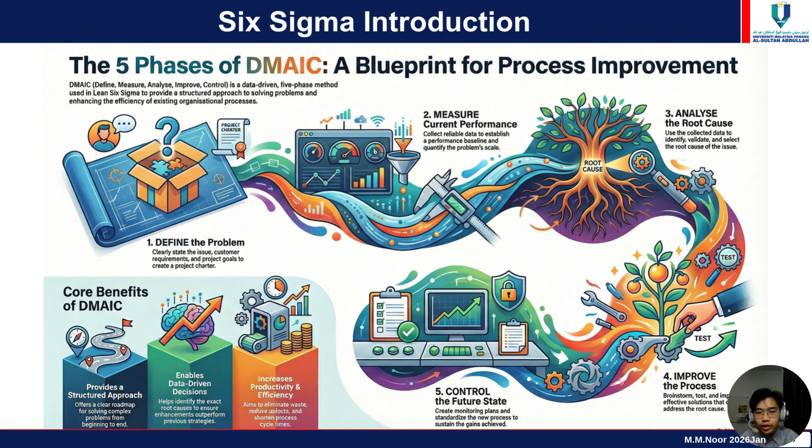Six Sigma DMAIC. Okay, now we are walking through the core engine of process excellence, the Six Sigma DMAIC framework. And if you look at this visual roadmap, you'll see that DMAIC isn't just a set of instructions. It is an interconnected life cycle. It takes us from identifying a chaotic problem, systematically measuring it, isolating the root causes, and finally establishing an automated control loop. And the key takeaway here is simply by applying this structured loop, we replace guesswork with data-driven execution, directly boosting our baseline productivity and product yield.

And as shown in this slide, this is our step-by-step pipeline. We start by defining the scope and locking in customer targets. Next, we measure our current baseline performance to understand exactly where we stand. Then we analyze the data to separate the real root cause from mere symptoms. In the improve phase, we deploy and pilot optimized fixes. And finally, we control the new process so we never slip back into old habits. It's a continuous journey where every phase acts as a foundation for the next.

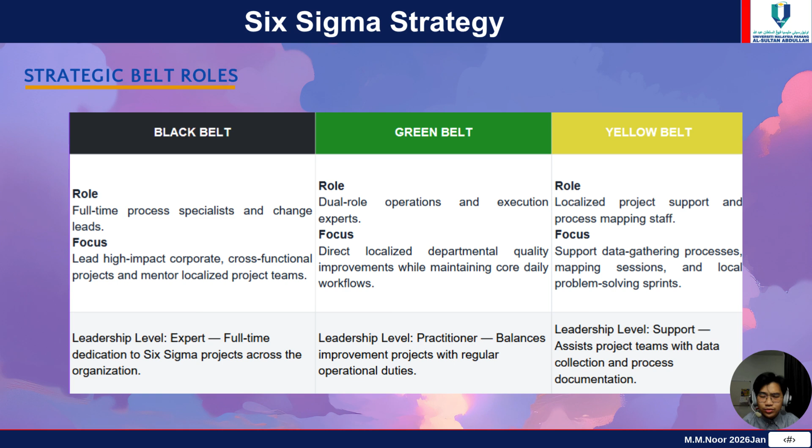So now, how do we organize our teams to actually execute this? Think of black belts as our full-time project leaders who can handle cross-functional, highly complex systems. And green belts are our operational practitioners; they balance daily engineering and manufacturing duties while leading localized improvements. And finally, our yellow belts support data collection and local process mapping. Having this clear division of labor ensures every tier of the factory has a direct hand in our quality culture.

And let's address a critical operational question. Out of hundreds of potential issues in a factory, how do we choose which project to tackle first? We use the two filters on this slide. First, customer alignment. The project must address a critical to quality parameter, meaning it must matter directly to the end customer. And second, feasibility. We look for projects with a clear financial return on investment (ROI) that our team can realistically execute within a tight 3 to 6 month window. If it doesn't align with the customer and it isn't feasible, we don't run it. This keeps our efforts tightly targeted and incredibly high yielding.

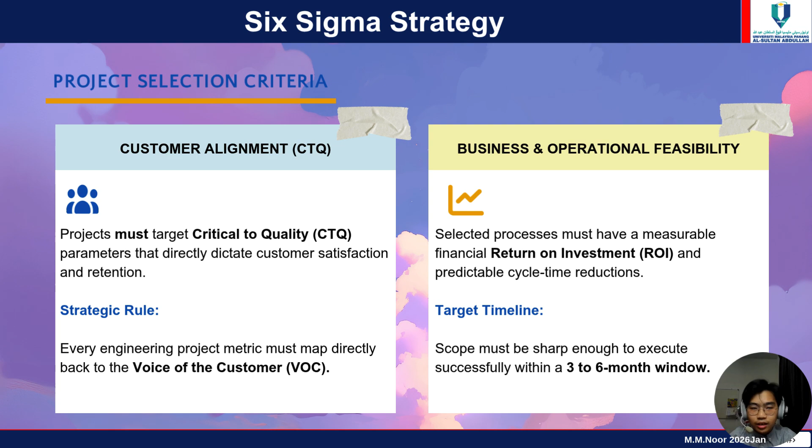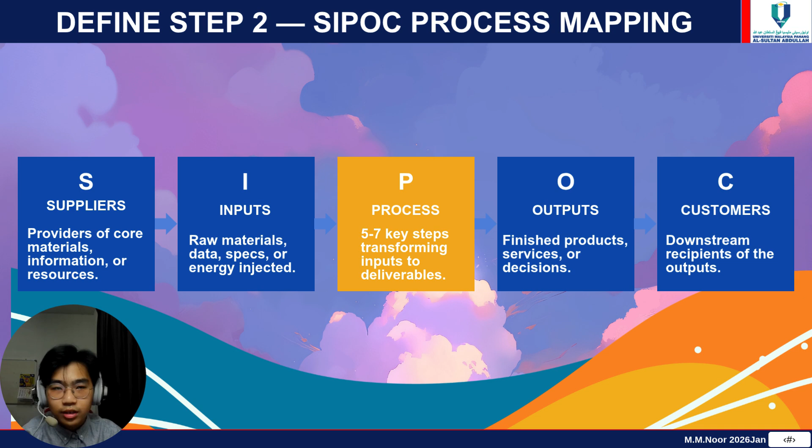Next, to ensure everyone is looking at the same process from a bird's eye view, we deploy a SIPOC map. This lets us align our perspective instantly. We map out our external suppliers and the critical inputs they inject, such as raw steel sheets or specific design tolerances. Those feed into our core 5 to 7 step process loop. And finally, we track our tangible outputs, in this case, our completed trays, and identify the immediate internal and external customer receiving team. This ensures that there are no blind spots regarding our process boundary.

Data collection is meaningless if we don't align it with what our market actually cares about. These metrics show exactly how we translate the qualitative voice of the customer into internal engineering metrics. For instance, when a customer complains that a component breaks too easily during assembly, we don't just guess a fix. We translate that into a measurable, critical to quality CTQ target, specifically setting our tensile fracture strength limit to greater than or equal to 450 MPa. Every customer complaint is converted into a clear, verifiable metric with an exact target specification.

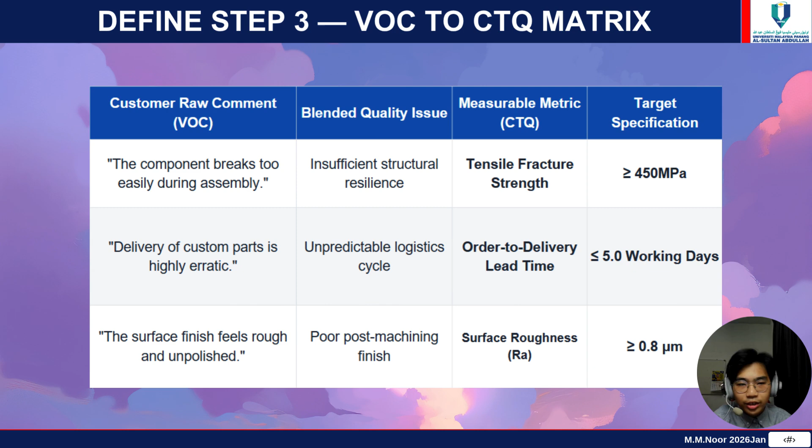So one of the primary reasons engineering projects fail is trying to fix the entire factory at once. To prevent that, we have drawn a hard line in the sand regarding project scope. Look at the green card on the left. Our team is strictly focusing on controllable variables, specifically the machining parameters on line 3, operator training for shift A and B, and our immediate steel tray thickness variances.

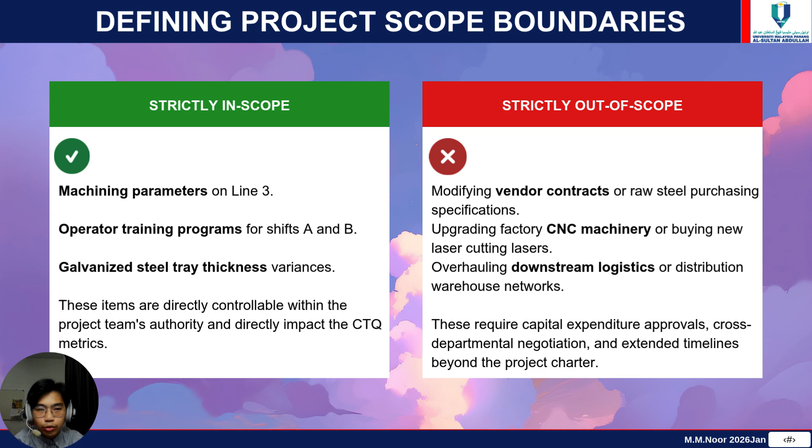Conversely, look at the red card on the right. Modifying vendor contracts, buying brand new laser equipment, or overhauling the warehouse logistics are strictly out of scope. This keeps our execution fast, targeted, and within our direct authority.

And to wrap up the define phase, I want to emphasize this critical warning on the left. Statistically, 50% of all process optimization projects fail before they even start, strictly due to poor initial definition. If you measure the wrong things or define your boundaries poorly, your improvement phase will yield zero real-world value. By locking down our problem statement, securing our business case, and clarifying our exact goal right now, we protect our resources and ensure this Six Sigma initiative delivers sustained, high-impact ROI, return on investment.

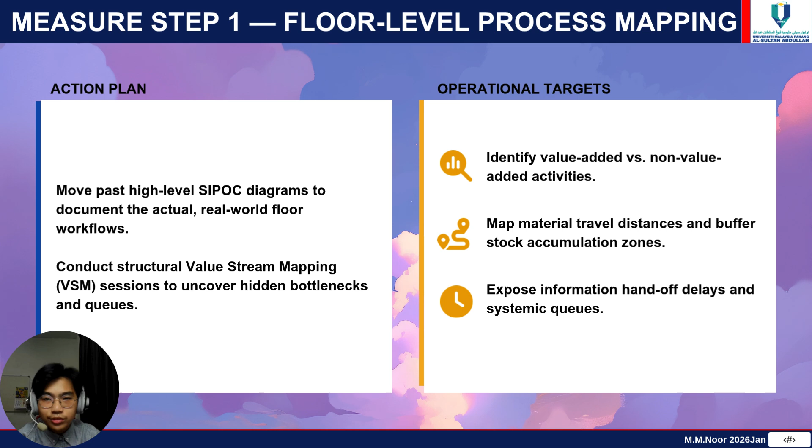Okay, let's move on to the measure phase. Alright, moving straight into the measure phase, our first operational milestone is floor level process mapping. While our previous SIPOC gives us a high level view, our action plan now demands that we walk the floor to capture how the process operates in the real world. We use structured value stream mapping, or VSM, sessions to physically track material travel distance, expose information hand-off delays, and flag accumulation zones where inventory sits in queues. By defining these targets, we clearly separate our true value added work from systematic waste.

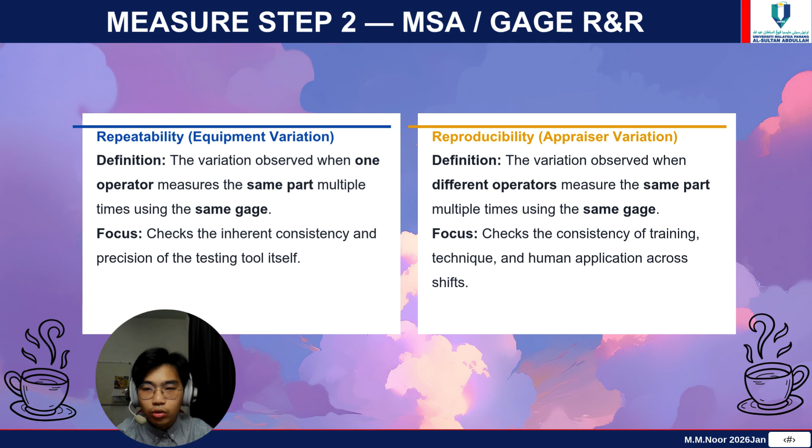Before we can trust any data we collected, we must validate our measurement system using a gauge R&R analysis. This isolates the two major components of measurement error. On the left, we look at repeatability, which measures tool precision, evaluating if a single operator gets the exact same value when measuring the same part multiple times. On the right, we evaluate reproducibility, which tracks appraiser variation across our shifts. If different technicians use different methods or look at the dials differently, our data is corrupted. We must lock down both elements to ensure a clean baseline.

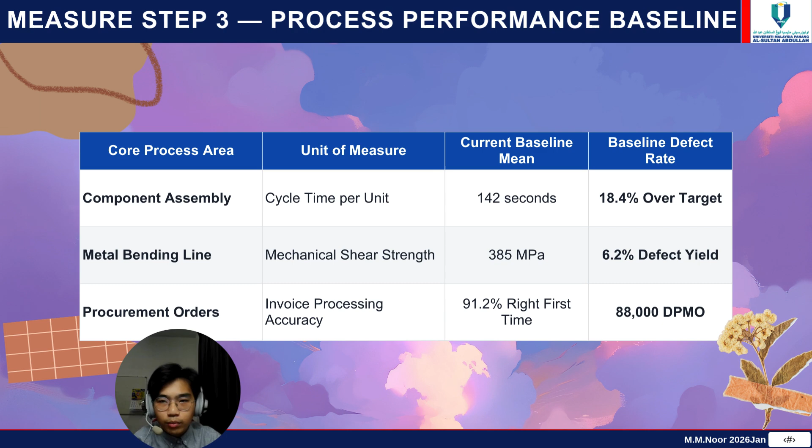And with a validated gauge system, we establish the concrete baseline performance profile you see in these metrics. Across our core process areas, the data reveals significant gaps. Our component assembly line is averaging a cycle time of 142 seconds, pushing us 18.4% over our target limit. Our metal bending line shows a 6.2% defect yield on shear strength. Most critically, our procurement order entry loop is generating a massive 88,000 defects per million opportunities. These metrics pinpoint exactly where our process stands today and establish the baseline we are going to improve.

As we manage this data, we split our findings into two categories shown here. On the left is continuous data, variables like assembly time, metal thickness, or fracture load. This data is highly preferred in engineering because it provides immense statistical power using relatively small sample sizes. And on the right is attribute data, which covers discrete counts like pass/fail metrics. While attribute data is simple to track, it requires much larger sample sizes to mathematically prove an improvement. Therefore, our primary diagnostic focus will remain on continuous parameters whenever possible.

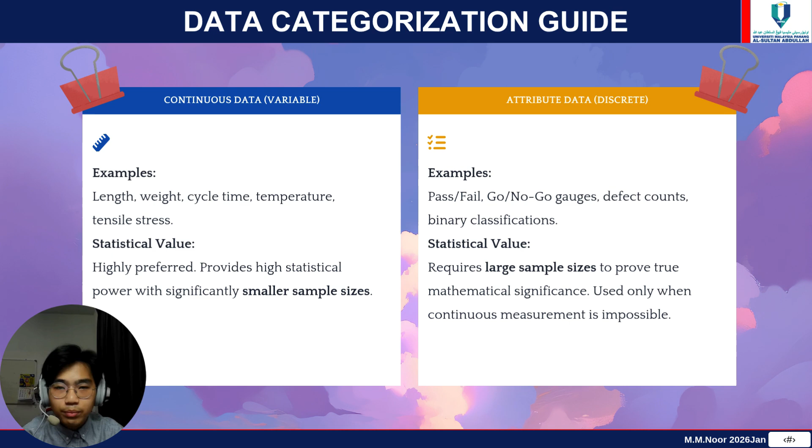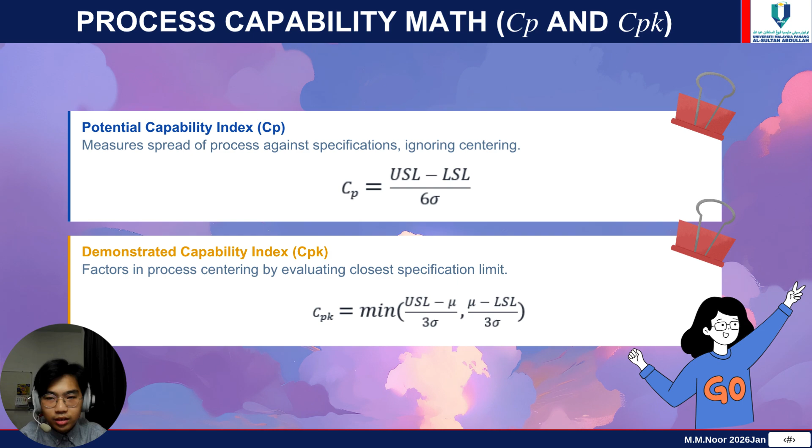And to close out our measurement loop, we must evaluate our overall system capability using two critical indices, Cp and Cpk. The top panel details our potential capability index, Cp, which looks strictly at the raw spread of our process against engineering specification limits, completely ignoring centering. The lower panel highlights our demonstrated capability index, Cpk, which accounts for real-world process shifting by measuring how close our actual mean is to the nearest specification edge. Together, these two metrics mathematically tell us whether our current equipment is truly capable of hitting our customer targets long term.

Okay, now we'll talk about the analyze phase. Moving into the analyze phase, our primary objective is to shift from gathering data to uncovering the actual source of our variance. We start by using the 6M root cause framework to brainstorm potential factors across the entire manufacturing floor. As you can see, we systematically break down variables into manpower, looking at training gaps; machine, analyzing tool wear or loose CNC clamping; and also method, evaluating SOP complexity. We then balance this by scrutinizing our material consistency, checking our measurement tools for operator bias, and factoring in mother nature, such as ambient temperature changes or floor vibration.

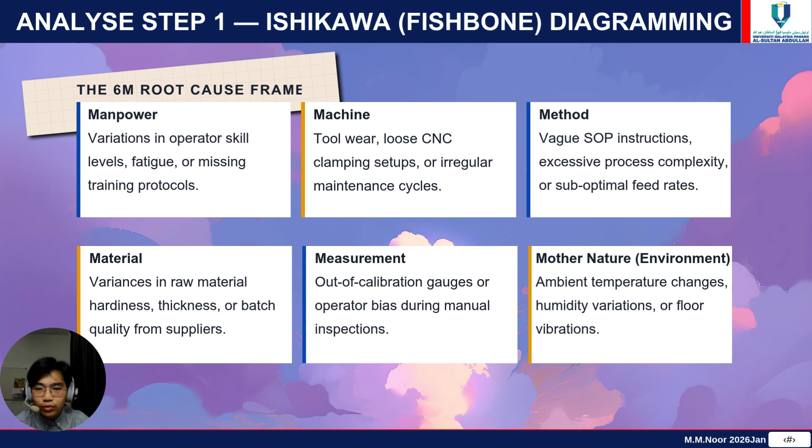This ensures we don't leave any stone unturned before testing our data. Once we identify potential variables, we use the 5 whys technique to drill beneath superficial symptoms down to the systemic issue. Take a look at this real-world case tracking post-shipment metal tray corrosion.

The initial symptom was a thin zinc plating layer. Asking why repeatedly tracks the issue through insufficient tank time and unauthorized line speed increases, all the way back to the operator trying to hit an unrealistic shift volume target. Ultimately, we uncover our true systemic root cause. Process schedules are being managed completely independent of verified machine capacity limitations.

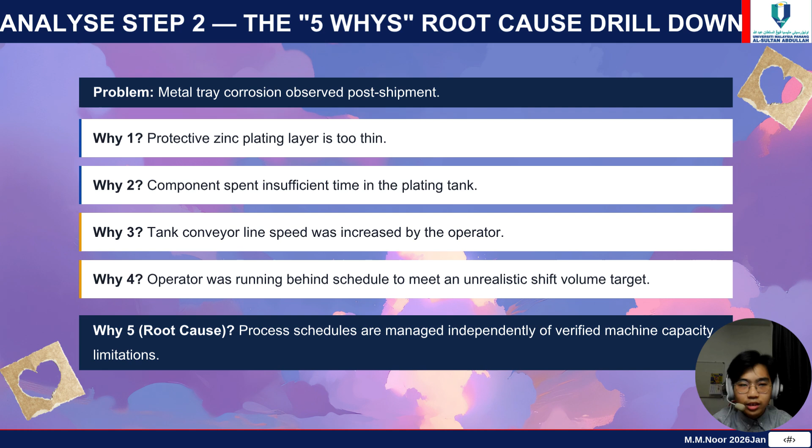Fixing the tank line speed is just a temporary bandage. Fixing the scheduling system solves the defect permanently. And brainstorming gets us theory, but Six Sigma requires statistical proof. This validation matrix acts as our engineering roadmap for testing our hypothesis. Depending on our data types, we pair the specified process variable against the output effect.

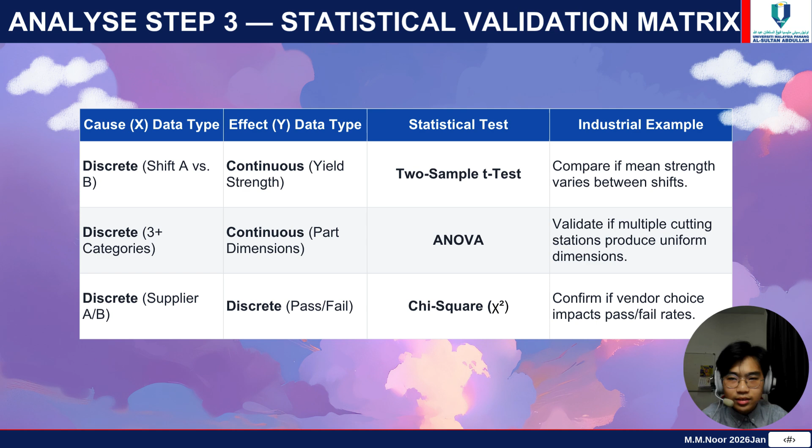For example, when comparing a discrete variable like shift A versus shift B against a continuous output like yield strength, we run a two-sample t-test. If we are evaluating multiple cutting stations, we scale up to an ANOVA. And finally, if we are evaluating purely discrete parameters, such as vendor selection versus a simple pass or fail rate, we run a chi-square test. These metrics ensure every single root cause we claim is backed by mathematical certainty.

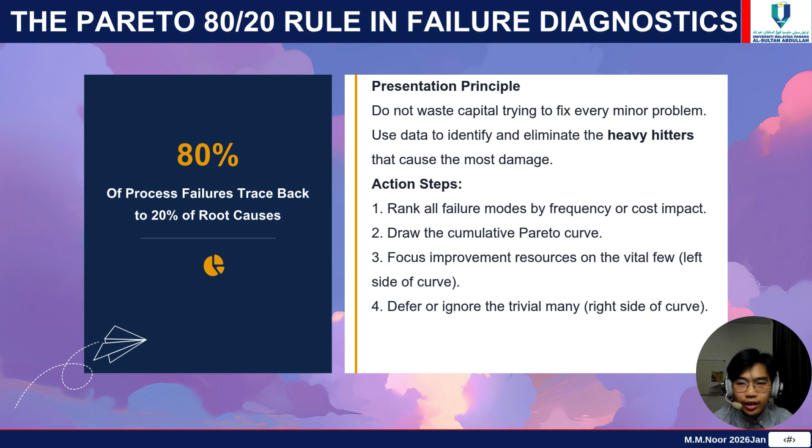Draw a cumulative Pareto curve and ruthlessly target the vital few on the left side of the chart. By eliminating those critical heavy hitters, we maximize our project ROI and achieve the massive quality gains we target in our charter. So to close out the analyze phase, we establish our exact mathematical decision boundaries through hypothesis testing.

The top block details our null hypothesis, H0, which assumes the proposed root cause has absolutely no statistical effect on process variance, and the middle block sets our alternative hypothesis, HA, asserting that a significant relation does exist. Most importantly, look at our decision threshold at the bottom. We only reject the null hypothesis if our calculated p-value drops below 0.05, which is the alpha. These mathematical rules ensure that we only advance to the improve phase when we have a 95% confidence level that we are fixing the correct variables.

And now we are moving to the improve phase. Moving into the improve phase, our immediate focus shifts to action. The goal here is to build a diverse portfolio of potential solutions before locking in our final execution path. We utilize 3 core pillars. First, cross-functional brainstorming sprints to bring floor operators and engineers together. Second, industrial benchmarking to adapt proven best-in-class methods from sister facilities. And finally, feasibility screening to rigorously filter these ideas against technical limits and budget realities.

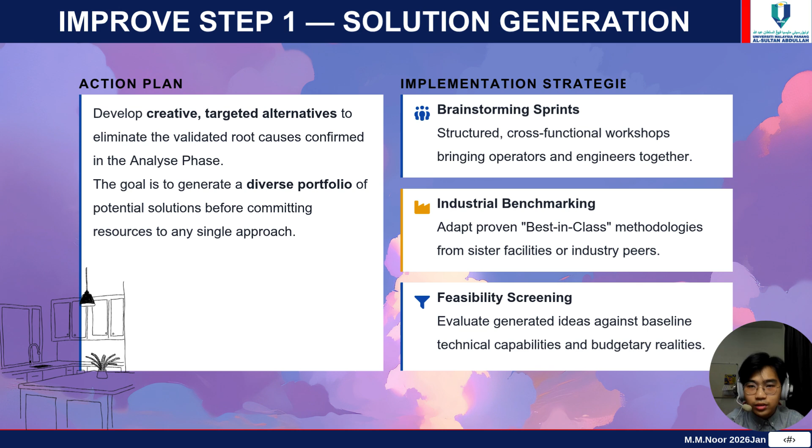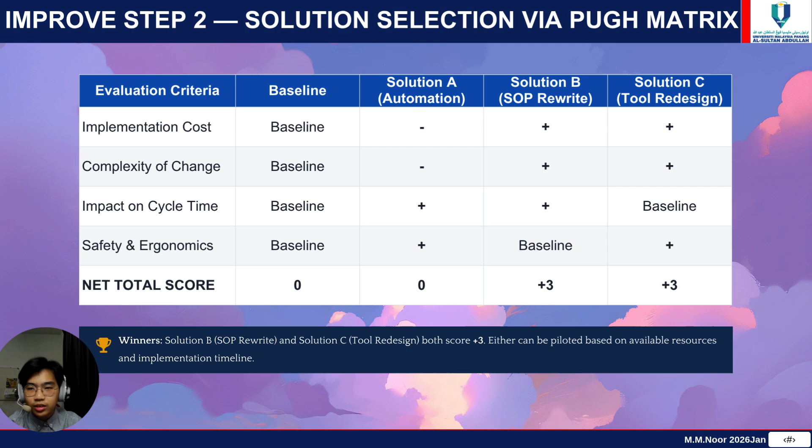To remove guesswork from our selection process, we evaluate our ideas against standard baseline criteria using this Pugh matrix. As shown in the matrix, while solution A, full automation, improves cycle time, it penalizes us heavily on upfront cost and complexity. Solutions B and C, which focus on targeted SOP rewrites and physical tool redesigns, both yield a net total score of +3. This clear matrix logic guides our decision on which solution to move into the pilot stage based on available resources.

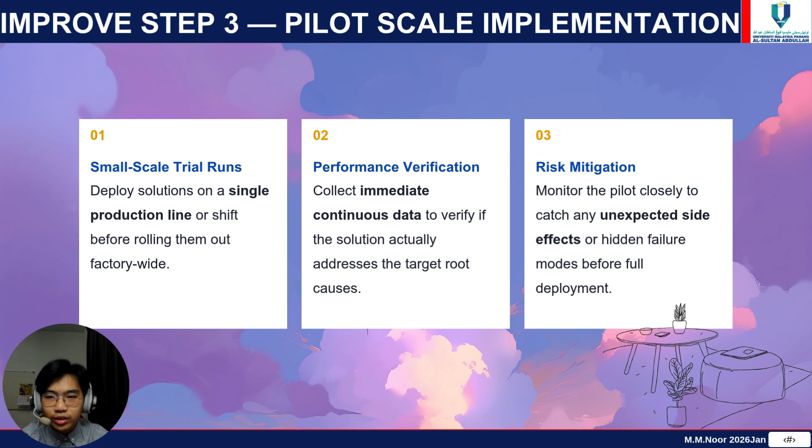And before rolling out changes across the entire factory, we minimize institutional risk via a pilot scale implementation. We execute this in 3 highly controlled steps. First, we deploy small-scale trial runs restricted to a single production line or shift. Second, we perform performance verification by gathering immediate continuous data to verify the fix works. And third, we focus on risk mitigation to catch any unexpected side effects before full-scale deployment.

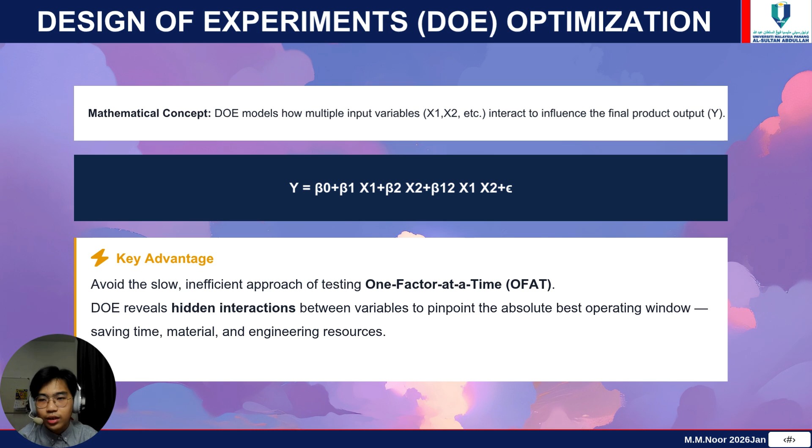And to find the absolute best operating window for the process, we look at the mathematical model behind design of experiments. The core formula in the center shows how multiple input variables and their hidden interactions mathematically determine our final product output. Why? The massive advantage here is that we move completely away from the slow traditional approach of testing one factor at a time. DOE pinpoints our optimized target parameters in far fewer trial runs, saving massive amounts of engineering time and materials. And to lock in this improvement permanently, we implement lean poka-yoke, or mistake-proofing mechanisms.

On the left, we prioritize prevention, the highest value strategy, where the physical design makes errors impossible, such as creating asymmetric component nests. On the right, we back this up with a detection system, using automated optical or limit sensors that immediately halt a CNC press brake cycle if a component is misaligned. This ensures defects are stopped before they can even be created.

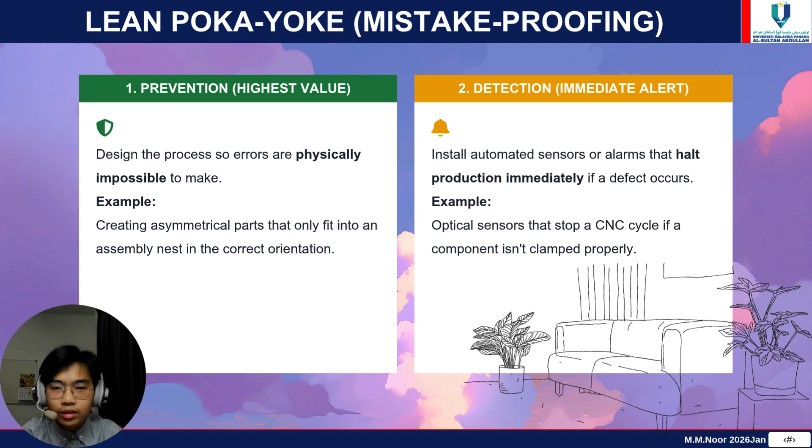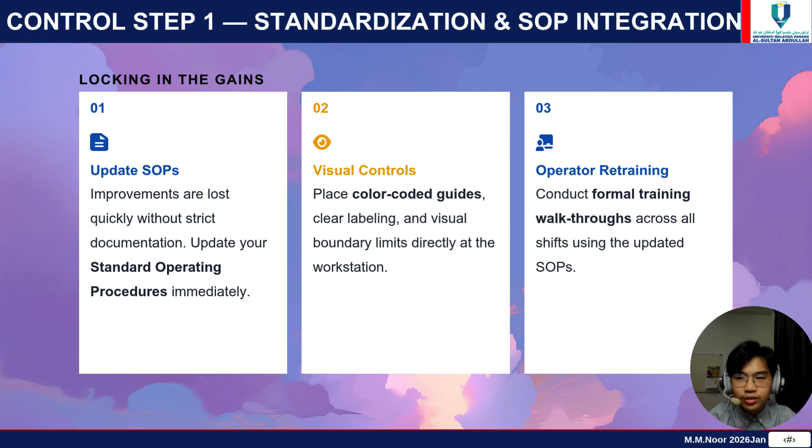Second, we establish visual control on the plant floor by placing color-coded guides and visual boundary limits directly at the workstations. Third, we drive operator retraining with formal walkthroughs across all shifts to ensure the new standards become daily habit.

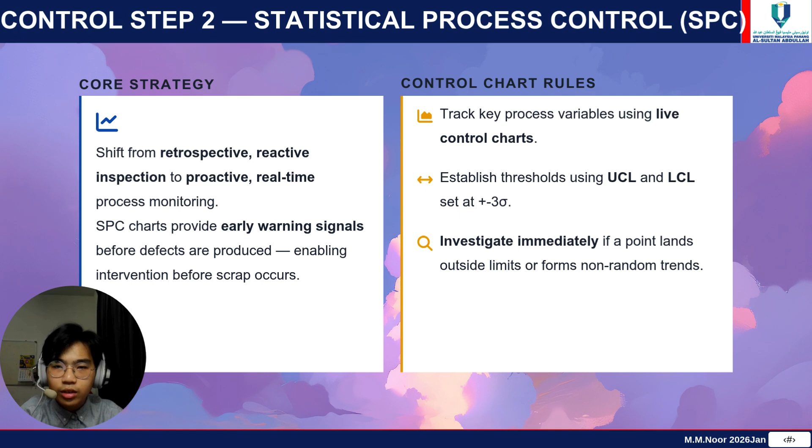To ensure the process stays stable, our core strategy shifts away from traditional reactive end-of-line inspection toward proactive real-time monitoring. Under our control chart rules on the right, we track our critical parameters using live charts. By establishing mathematical thresholds, specifically our upper and lower control limits set at plus or minus 3 sigma, we create an early warning system. Operators can catch non-random trends and intervene to adjust the machine before a single piece of scrap is ever produced.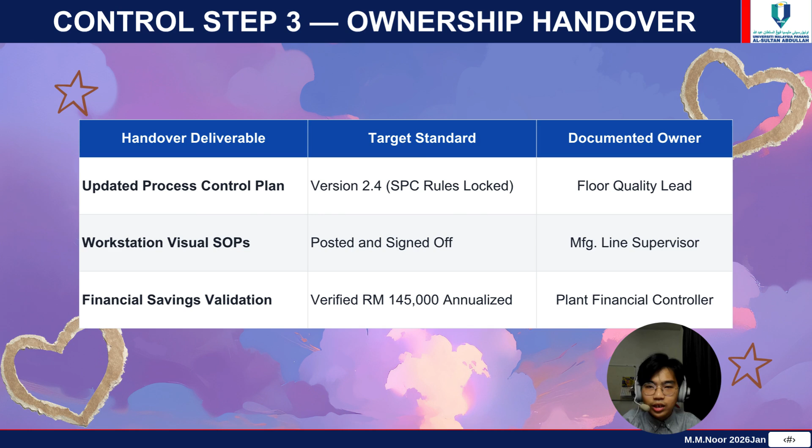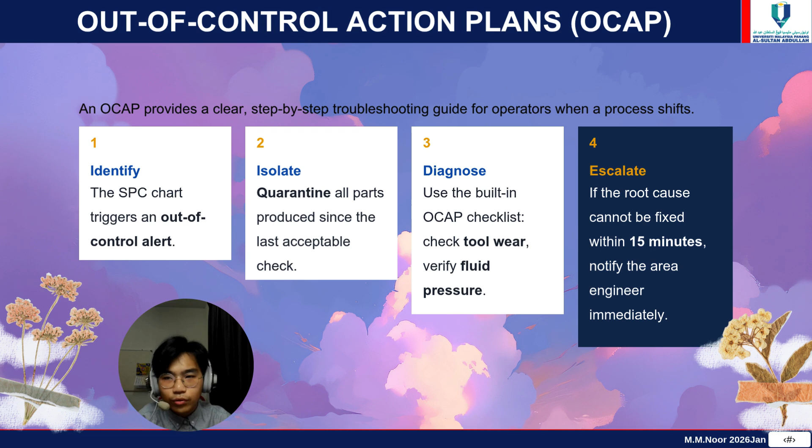However, if a process does happen to shift, we do not guess the fix. We follow a strict out-of-control action plan, which gives floor operators a step-by-step troubleshooting roadmap. Step 1 triggers the moment the SPC chart flags an anomaly. Step 2 requires the operator to immediately quarantine all parts produced since the last verified check. Step 3 utilizes our standardized checklist to diagnose common culprits like tool wear or fluid pressure. And most importantly, step 4 sets a hard rule. If the issue cannot be resolved within 15 minutes, it is immediately escalated to the area engineer.

To wrap up the control phase, let's look at the mathematical reality behind long-term production. In engineering, processes naturally drift over time due to tool wear, ambient temperature variations, and material changes. To account for this, Six Sigma introduced a 1.5 sigma mathematical adjustment when calculating long-term performance. This means a process operating at a short-term Six Sigma level naturally builds in a buffer, resulting in a long-term yield target of 3.4 DPMO. This standard accounts for real-world variation and ensures excellent quality over time.

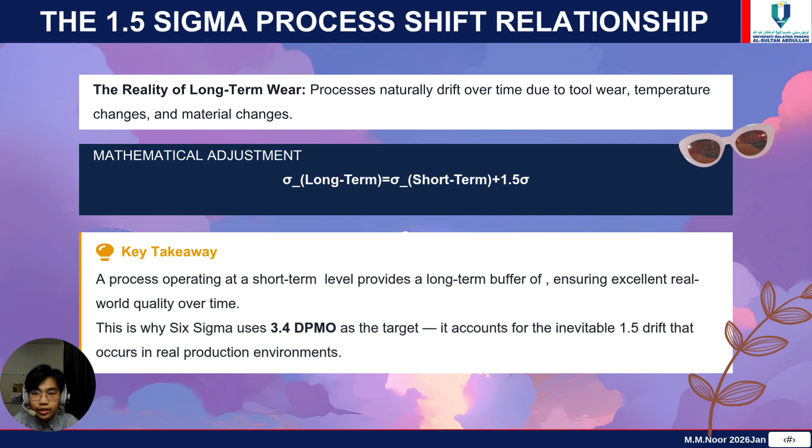In a nutshell, we'll make a conclusion for the whole slide. To conclude our DMAIC journey, let's review the hard numbers in our project performance roll-up metrics. As the table clearly illustrates, this project has delivered measurable, statistically validated improvement across all 3 critical operation dimensions. First, in terms of quality, we crushed our process defect rate from a punishing 14.2% down to less than 0.4%, netting a massive 97.1% reduction in factory scrap.

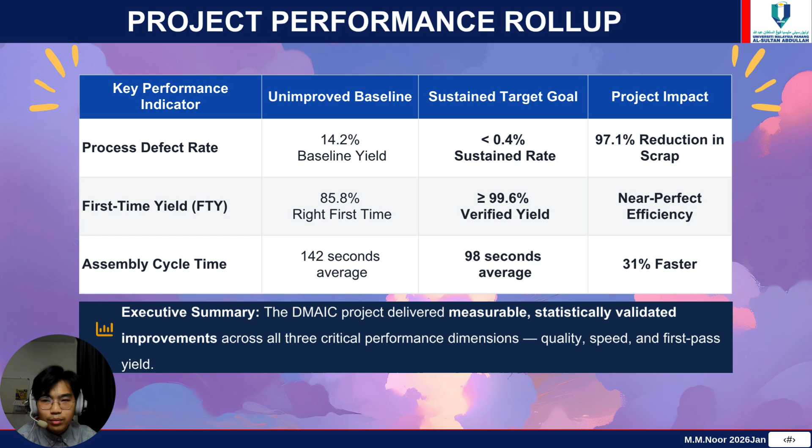Second, our first-time yield advanced to a near-perfect 99.6%. And finally, we optimized speed, trimming our assembly cycle time by 44 seconds, meaning our line is now 31% faster. We didn't just meet our charter targets, we established a new benchmark for operational excellence. But the ultimate test of any Six Sigma project is its longevity. As highlighted on the left, we have achieved over 365 days of verified process stability. This wasn't a temporary spike in performance.

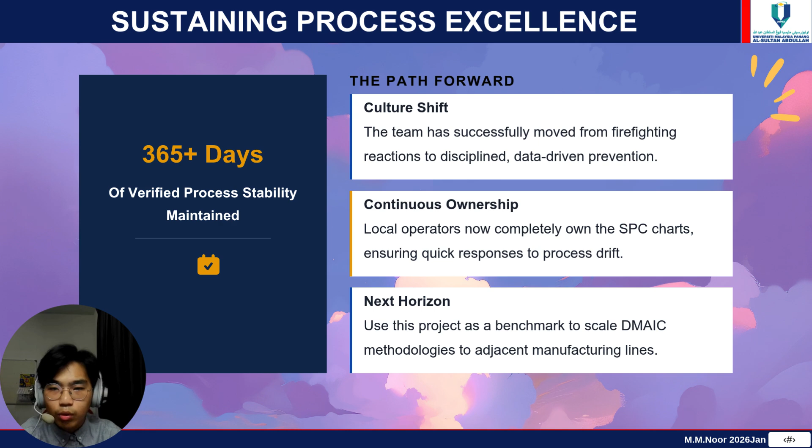Looking at the path forward on the right, this project succeeded because of 3 things. First, a fundamental culture shift where the floor team moved away from daily firefighting toward data-driven prevention. Second, complete continuous ownership, meaning our local operators actively manage the SPC charts to stop process drift immediately. And third, our next horizon, where we will now use this successful deployment as the official engineering blueprint to scale these exact DMAIC methodologies across all adjacent manufacturing lines.